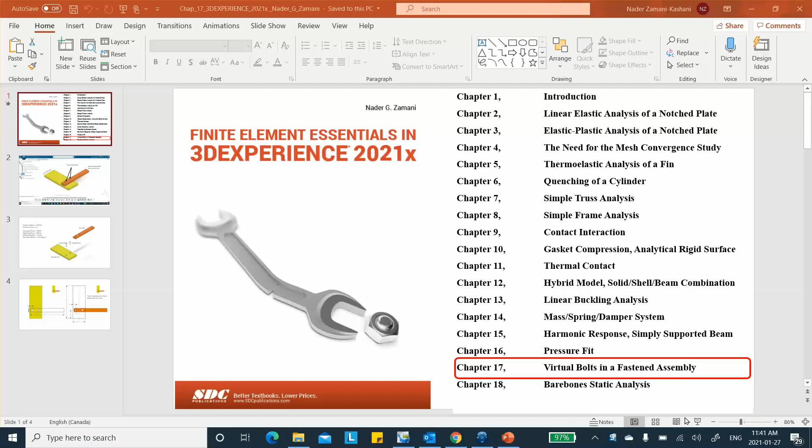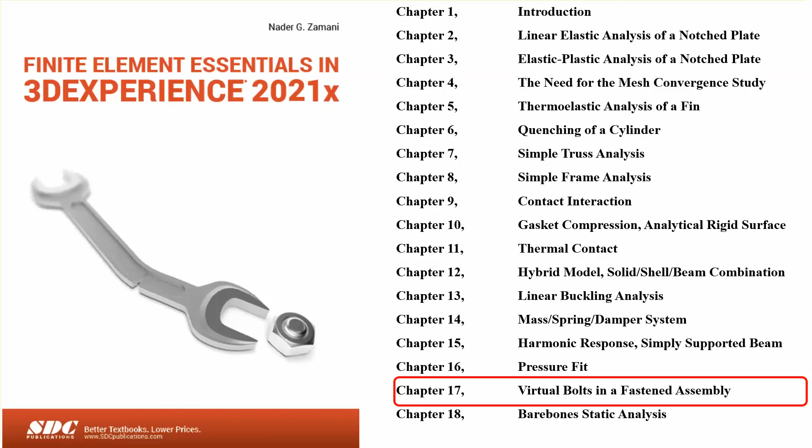All right, so there is chapter 17. In the older edition of the textbook, back in 2017 or 2018, this chapter was not there, and I've decided to put something about bolts in here, so that's what it is.

Here's the setup, and we have a yellow part, which I'll call the bottom part, and there is a top part, the orange one, and these are fastened together at those two bolt holes. The left end of this clamp plate, the yellow plate, is clamped, and the right end of this orange piece is subjected to downward force.

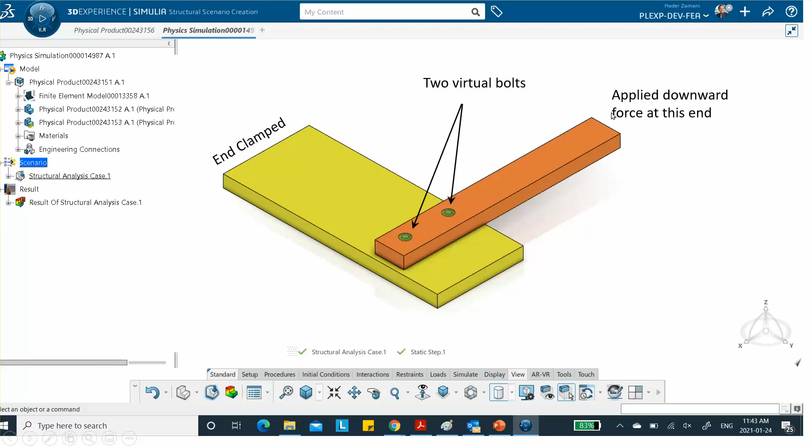So we're not going to be using a three-dimensional bolt model. We're going to be using a virtual bolt model, and the material is assumed to be elastic. This is the actual force applied to the orange part, 1,000 Newton, and the bolt force, or tightening force, or preload force, in each bolt is 1,000 Newton.

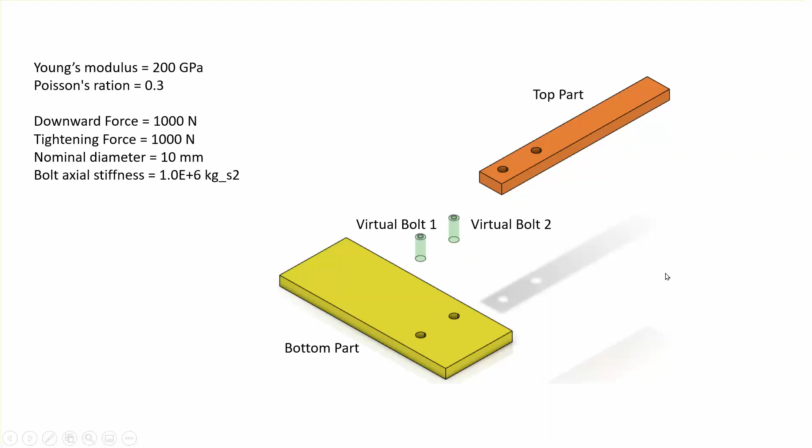Now, since I'm going to be assuming that the bolts deform, I will use a deformable version of the virtual bolt. I need to specify the stiffness for it, and the unit of stiffness in 3D Experience is kind of odd. Usually it's Newton per meter, and this has the same type of units, except that you're gonna have to multiply it by G, or divide by G, to convert from one to the other.

The dimensions are given here. These are very simple parts, so I'm not going to be spending time on modeling them. These parts were already created, so I'm going to bring them into assembly and put it together, and then we're going to run the problem.

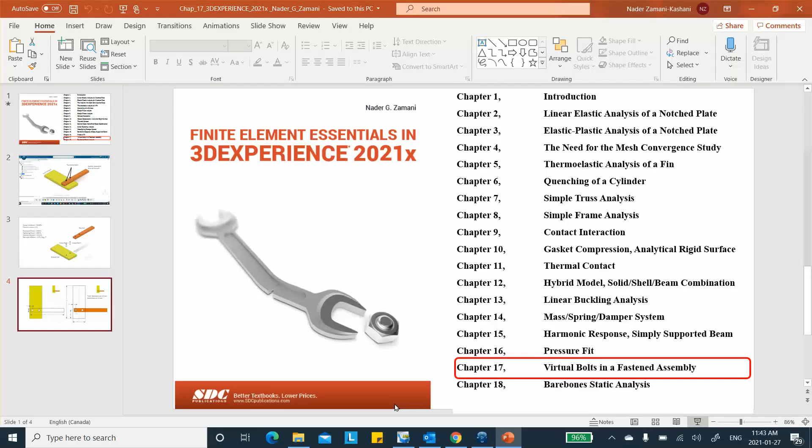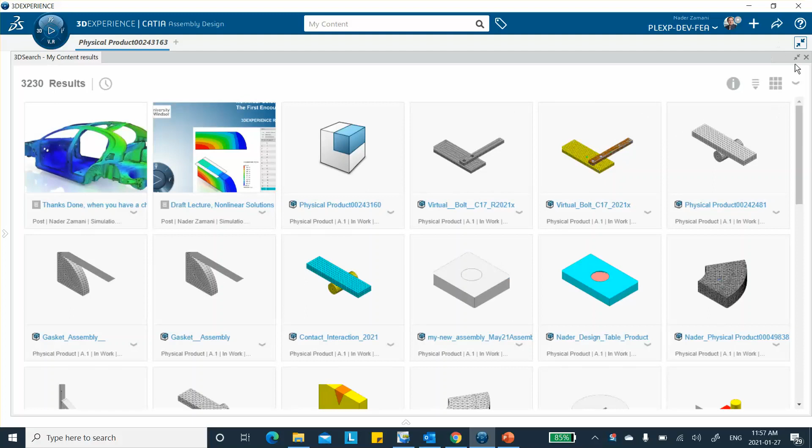All right, so let's see, are we there? Yes, I already made the part, so let me go ahead and search under my contents. First of all, I created an assembly here. These parts I created a few days ago, so I'll put it together. Let me sort this out by date. The two parts that I want are this one, the bottom and the top part.

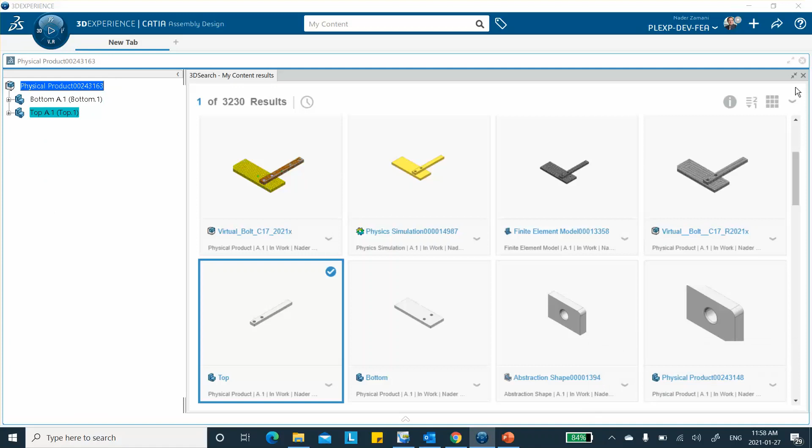Let me see what's the best way of doing this. Okay, where did it go? Right there, this is the bottom one. I'm going to take it and put it in there. And there's the top piece, put it in there too. Top and the bottom. I'm going to close this, save it right away.

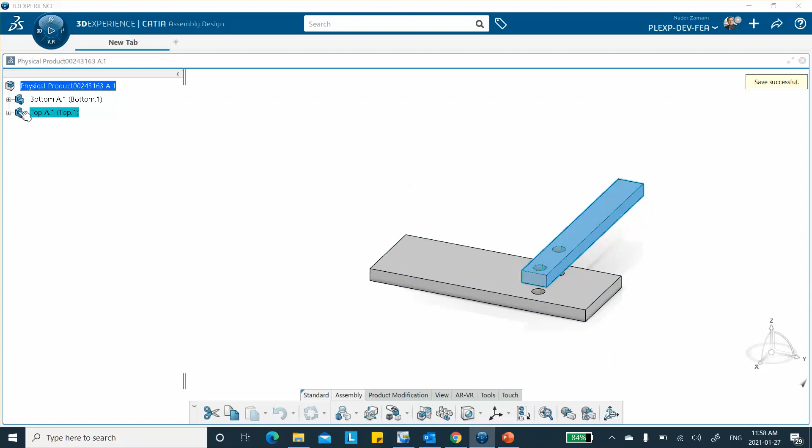Notice that I have to properly impose these two pieces together as an assembly with assembly constraints. Now, in the book, I didn't talk about it, I assumed that they were already in position. This is why I didn't bother putting constraints here, and because of that, these holes may not have been exactly lined up. That's why I got a warning message. But I'm not going to make that mistake here, so we'll fix it.

Right click, first of all, let's change the color of these things. I changed this thing to yellow, this is the bottom piece, and this one to orange.

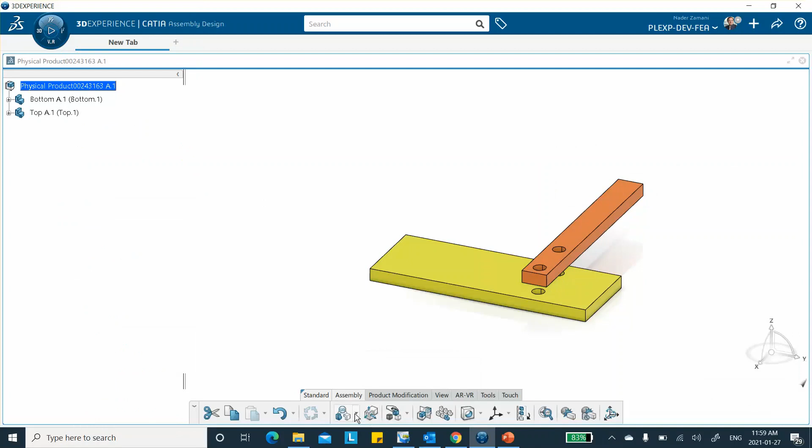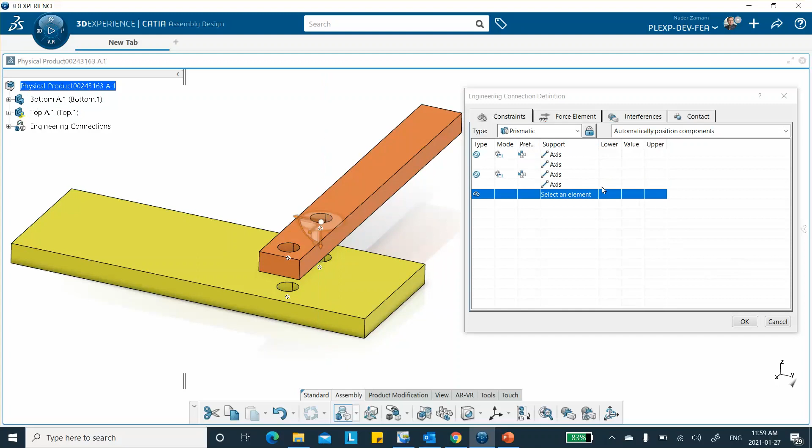Now we're going to go and create assembly constraints to bring these and put it together. So let me click on that. The hole up there and the hole down here, see, slightly moved it. These other two must be lined up, but just in case, I'll do this and that. Finally, contact, bring these two together, so I select this bottom surface and the top surface and say OK.

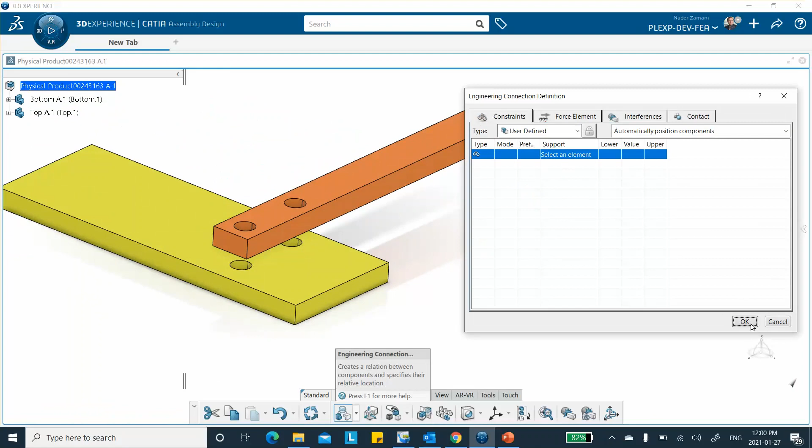Whoops, I don't think I did this last one properly, let's check it out. I'm not even sure if I actually... oh yeah, I probably accidentally pressed cancel. Okay, let's try it one more time. This axis and that axis, okay, this axis and... let's try it.

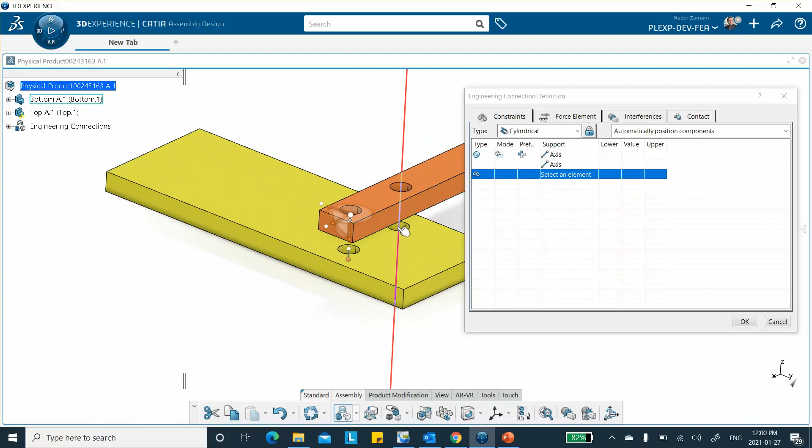This axis and this axis, this axis and that axis, and then this face and this face. Good. Okay. We're in business now.

So these things have material properties. I don't really need these constraints, I can delete them, it doesn't do anything, so I'm going to delete this. These parts were already assigned material properties, however there's a question mark here, so let me update.

We'll worry about it later on. Okay, so this is done. I'm going to save this.

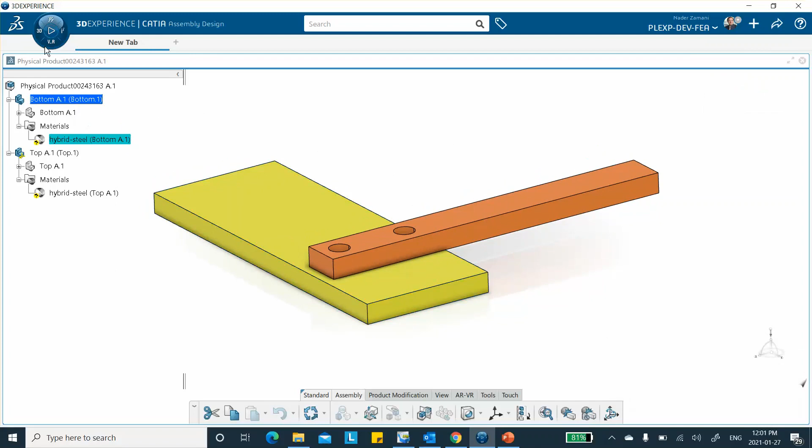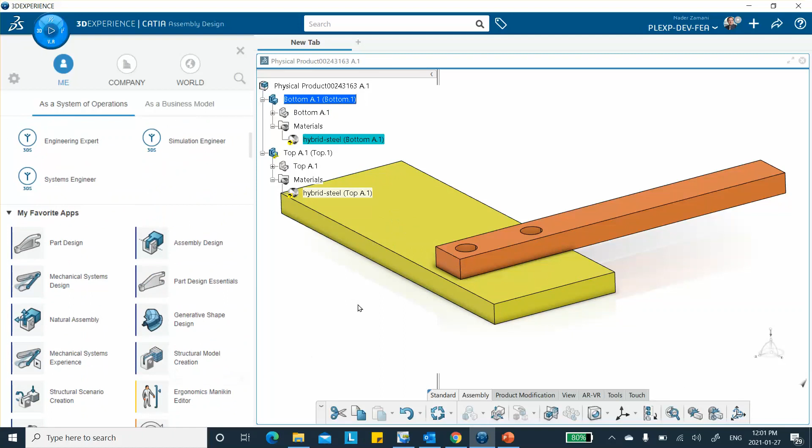Now we're going to go to structural scenario, structural model creation. But be careful, and I make a big fuss of this in the book. Right now I'm in one of the parts, and if you go to structural model creation, it will just mesh that part. So make sure before you go to structural model creation, you're at the assembly level. That means double click on the top line, make sure you're in the assembly design, and now go to structural model creation.

So what happens now is it's going to create meshes for these two simultaneously and put it at the top level right there. See, if I was in one of the parts, it would take this and put it in there, and then I'd have to do some more work to work it out.

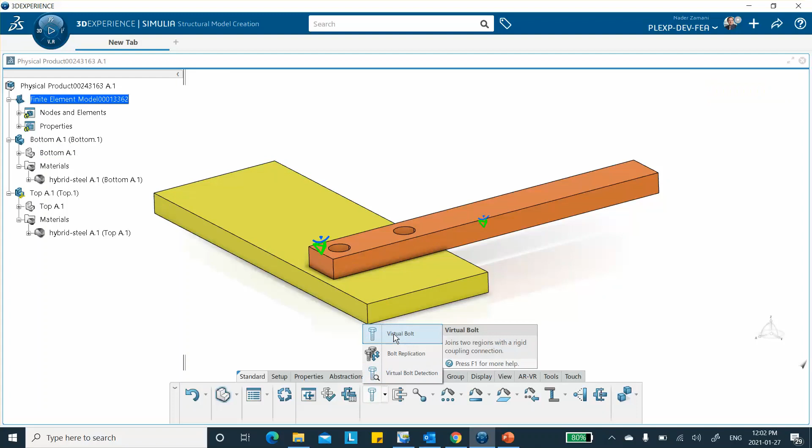Okay, this is fine. And now what we're going to do is create our virtual bolt model. We're going to use this one, okay? And it's asking for support one, so let's start with this one on the left, the bolt on the left.

So I select the top inside surface of that hole, and for the second one, let me cancel this and show you one more time. So we go virtual bolt. Notice that the top one says support one, and the second one is always ground unless you change it. So I want this surface, okay?

And when I did that, because these were already lined up, it automatically picked the surface below it. But when you follow the book, because these weren't lined up, I had to select the top, and then for support two, I had to select the bottom. So this is one step ahead, and I like it better here. In the book, for support one you take the top hole, and for support two you select the bottom hole, and it let me do that. But here, because I already put constraints on them and they're lined up, it automatically picked the other one.

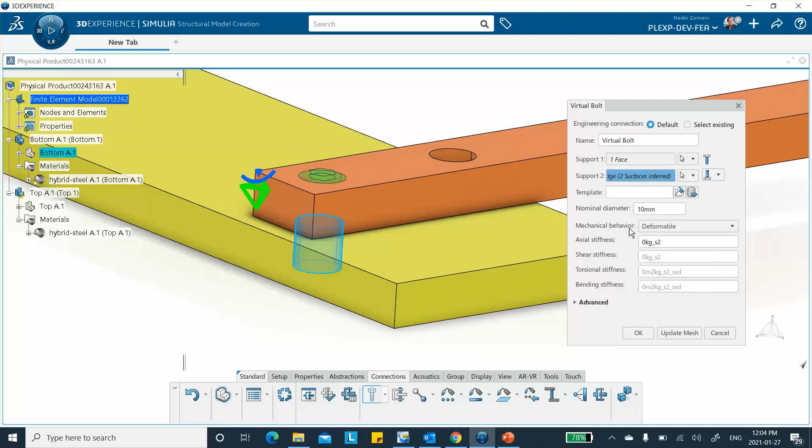As for the type, the inside nominal diameter is 10 millimeter, the diameter of that hole is 10. And for the stiffness, I'll put 1e to the 6, I believe. Okay, and just say mesh.

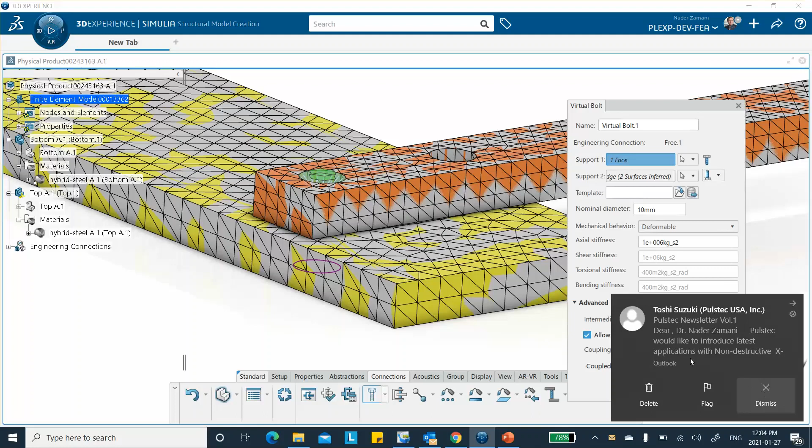Now I do exactly the same thing for the other bolt. So let me close this. Okay, so we can hide this mesh, it's easier without it. Right click, mesh visualization manager, mesh hide. Very good. Let me put this thing on the side here for you. Do another bolt.

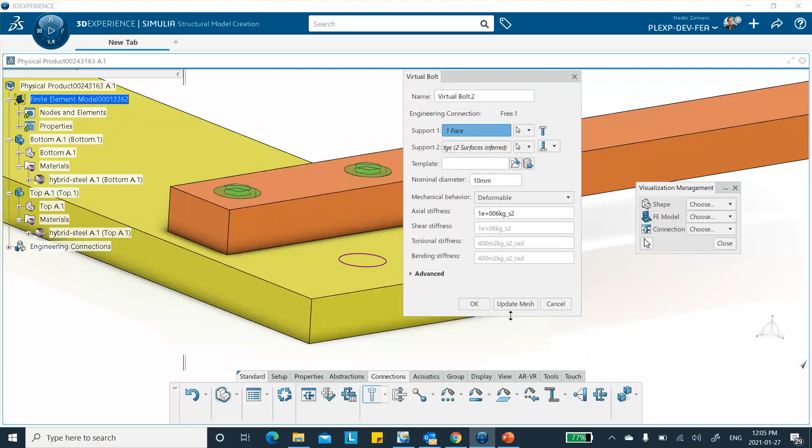See, it says ground here. When I select the top one, automatically it goes and selects the bottom one because they were already lined up. And I put the same stiffness, right? Same stiffness - they don't have to be the same, it could be different bolts, different type of bolts, but that's not what we're doing. Update mesh, okay, and say okay. Good. Save it.

All right. Notice that when you look at nodes and elements, you have the standard tetrahedral mesh for the yellow piece and the orange piece. You can go change the type, you can go change the size, and there are also two virtual bolts that are created here. Okay, so we are done there.

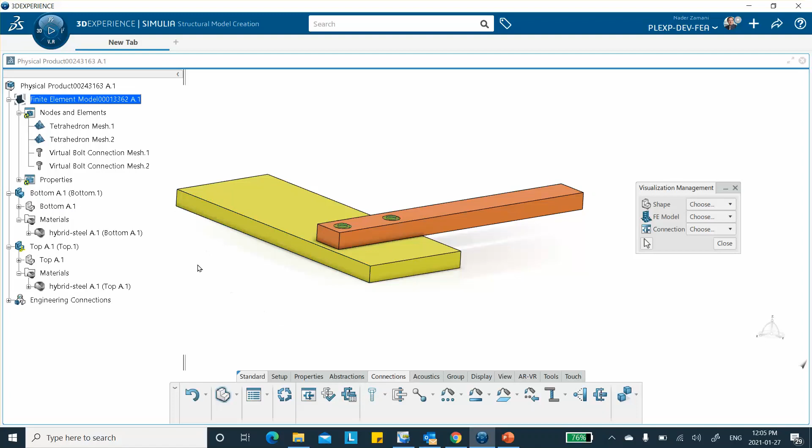And we're going to go to scenario, creating scenario, structural scenario creation. It's a structural problem.

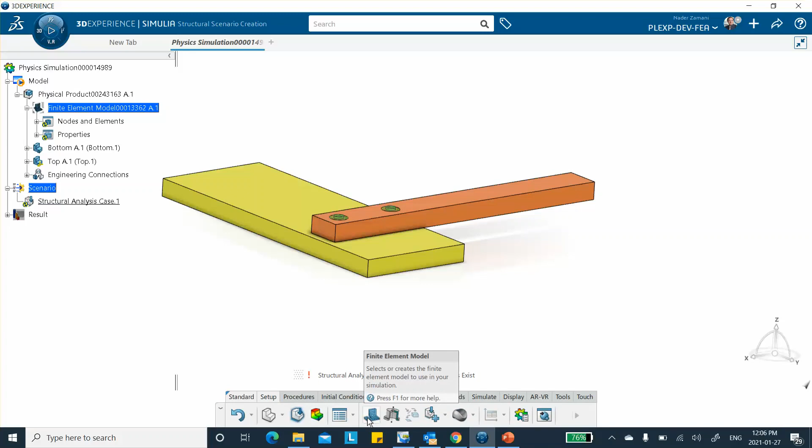Notice the usual two exclamation marks. The first one is set up, and it says select your finite element model. I select this. Now in the book there's something different on top, probably created because these two holes aren't lined up. But this is fine, so I select this and say OK.

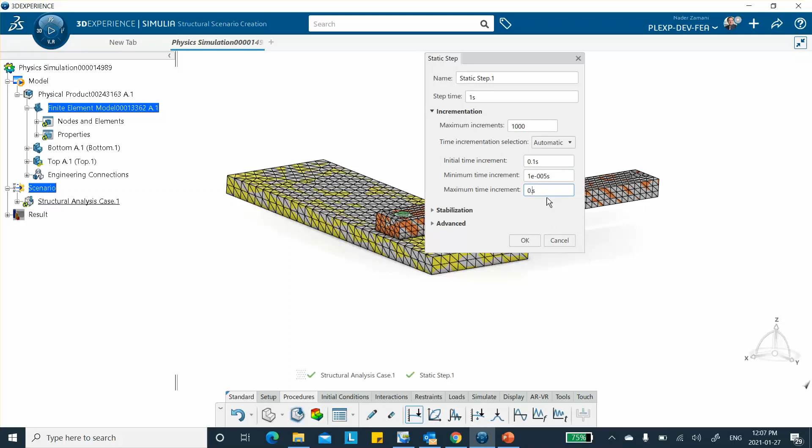Notice that this turns green. Now we're going to do the procedure. It's a static problem, so as soon as I do this, it's going to light up and turn green. I'm going to make the initial time smaller because I don't want this to be only 2 steps. I want it to go a few steps so I can see the development of the deflection. I'll make this one 0.5, not too big, though it will work with the defaults too. Say OK, and if you want to include nonlinear geometry and large deformation, check this. Otherwise leave it out. We will include it.

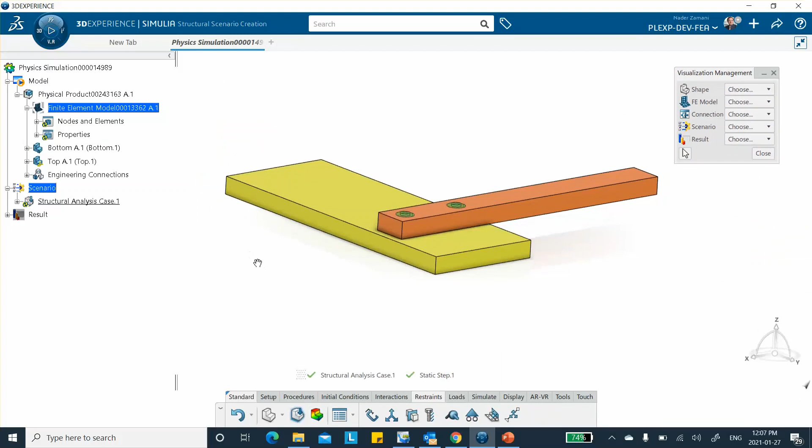Now we're going to apply our restraints. Let me hide this mesh - right click, visualization management, hide the mesh. Put this on the side here. We're going to go to restraint. This end is clamped, this end is clamped. Clamp that end.

The end on the right side, I apply 1,000 pound on it, 1,000 Newton on it. So we go to loads, force on that face, minus 1,000. And you can see that's down here.

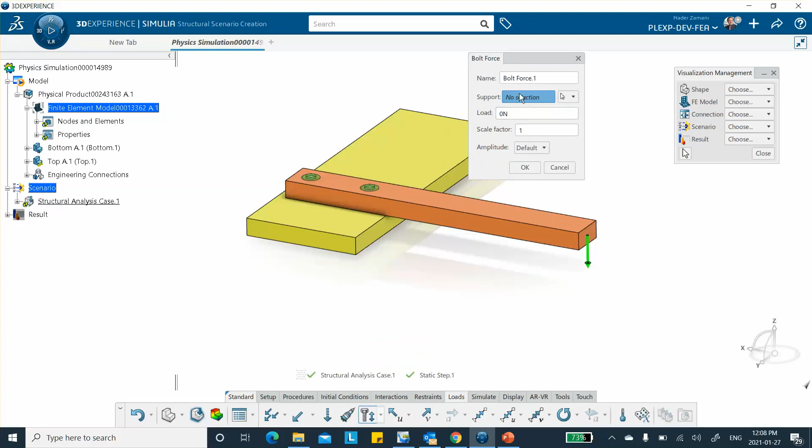Now I have to do the bolt forces, the preload or tightening force. If you look here, there is a bolt force, and that's the one I want - not the torque bolt force, and support is bolt 1. I can do that from the tree or from the screen. I select it from the screen - this is bolt 1, and I put 1,000 Newton in it. Remember, that does not have a direction. This is just the tightening force, which makes the bolt stretch and clamps the two pieces together.

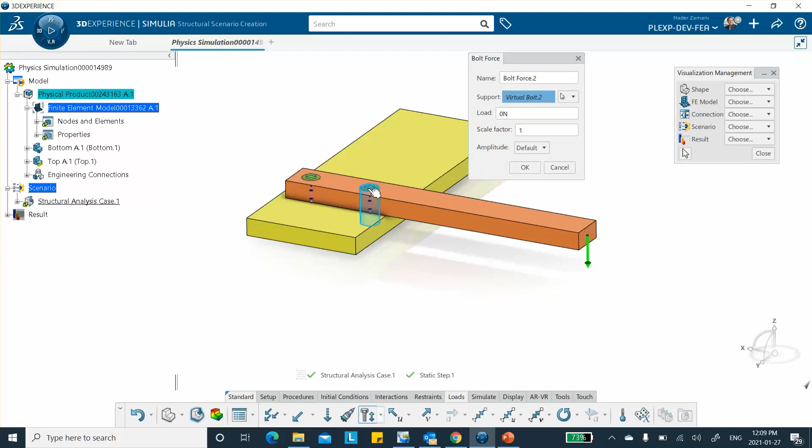Then apply or OK, and do another one for the other fellow right there. 1,000 - what is it, 1,000. Say OK. All right, and if I run this thing now, it'll bomb out because these two pieces don't see each other.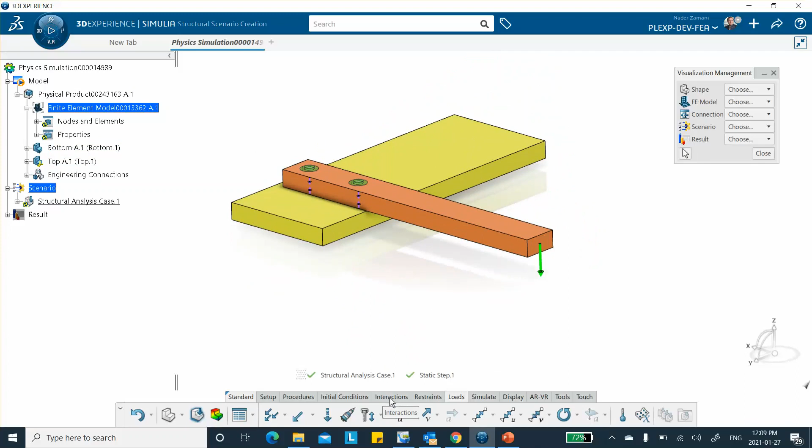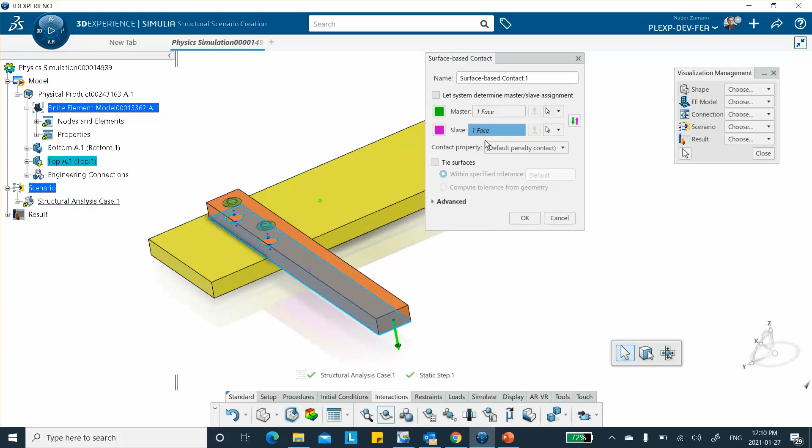So I have to create a connection, a contact constraint between these. We're not done yet - we have to create an interaction, surface to surface, surface-based contact. For the master, I'm not sure exactly what I did in the book, whether I selected this or the other one. There are some guidelines, but it doesn't matter that much in this problem - they're simple enough. I'm pretty sure I selected that surface for the master, and this bottom surface for slave. There are guidelines for selecting these, and if it doesn't work you can come and flip them, but this will work. Say OK.

And that's it - these two are not going to penetrate each other when we save everything. So we're going to go to simulate, we check it, and do a simulation check. Any error messages or warning messages will pop up at this point instead of running it and realizing there's a problem.

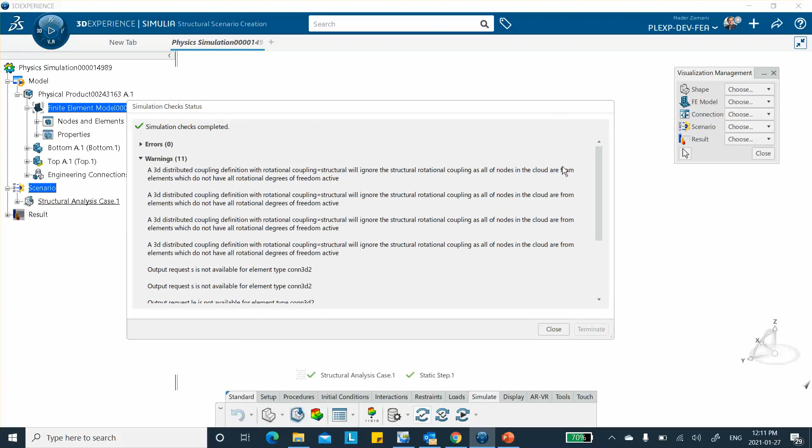In the book I got a variety of warning messages because of that constraint I showed you earlier. Here, we'll see how it goes - let's check what kind of message it is. Yeah, that's fine. The kind of messages I got without aligning those two is different. Okay, no messages, no errors. And now we're going to run it.

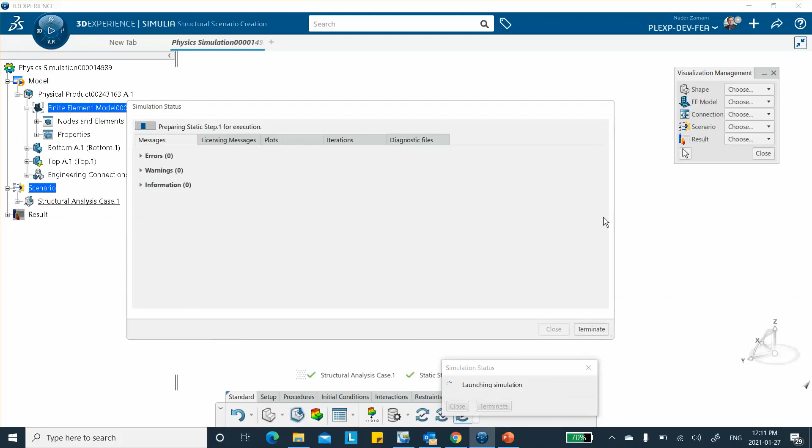While this is running, I want to remind you that the only difference between what you see here and what's in the book is that in the book, I did not apply those axis-to-axis restraints, constraints for the assembly. This is why I got some messages saying these holes are not lined up. But it did run.

Remember, these tabs tell you at what stage of the iterations you are with respect to a plot, giving a plot and an iteration number, etc.

So far, no error. These warnings are the same thing that appeared in the previous window. So, solving simulation.

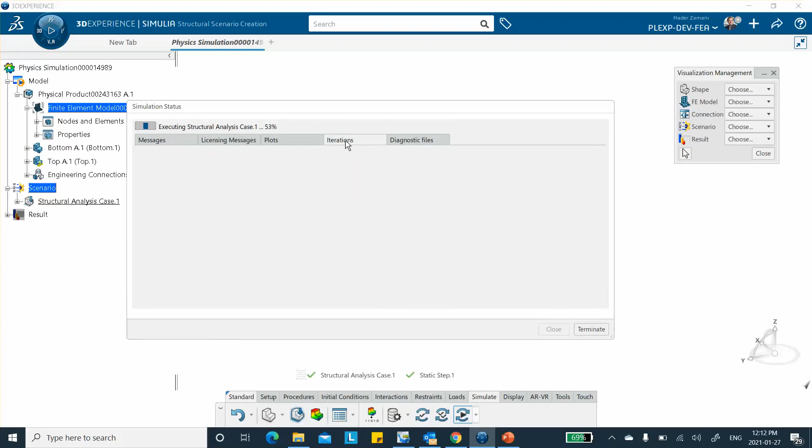Iteration count is right here. When it reaches 1, it means done. The full load was applied, and it did reach 1 right here.

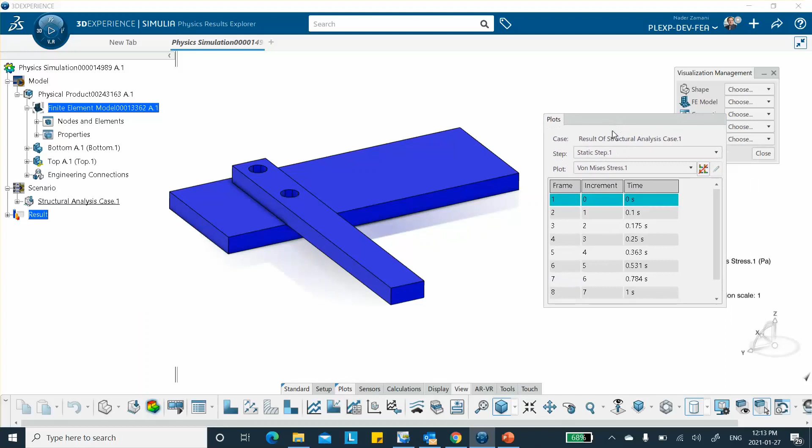Close this. So this is at the initial frame, which means no load applied. If you go to the next one, you see that this thing begins to bend, and of course it's like a cantilever beam. Biggest stress is going to be there. Then you go to the next one, etc.

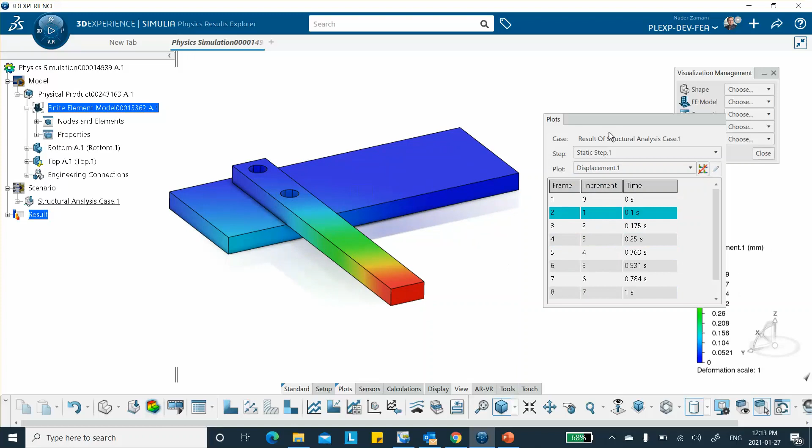And the last stage is this. You look at the deformation, displacement. Okay, first step is right here. These values, of course, mean something. So the last stage is here, 12 millimeters. This tip is deflecting 12 millimeters.

But if you look at the side, you see that there's a lift off here. What that means is that the force of this bolt was not sufficient. So what I'm going to do is double this force. Remember it was 1,000 Newton. I'm going to double it up.

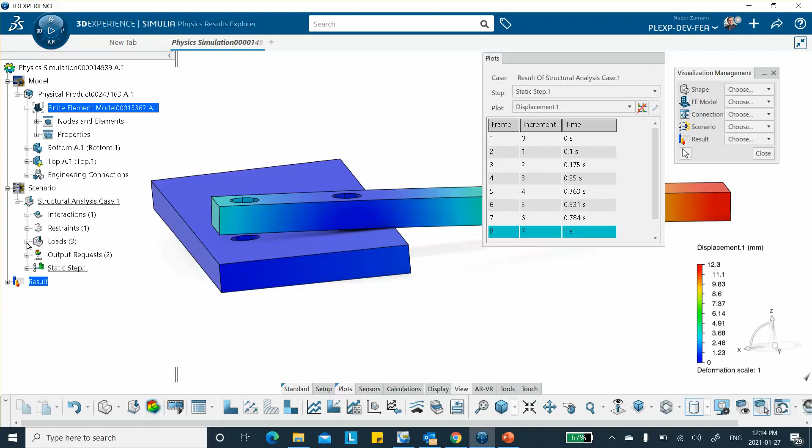So let's go back to the scenario here, and under loads and under the bolt force 1, I'm going to double click on it, and change this thing to 2,000, and say okay. Since I know that this, in all likelihood, will not have a problem running, I'm going to say simulate.

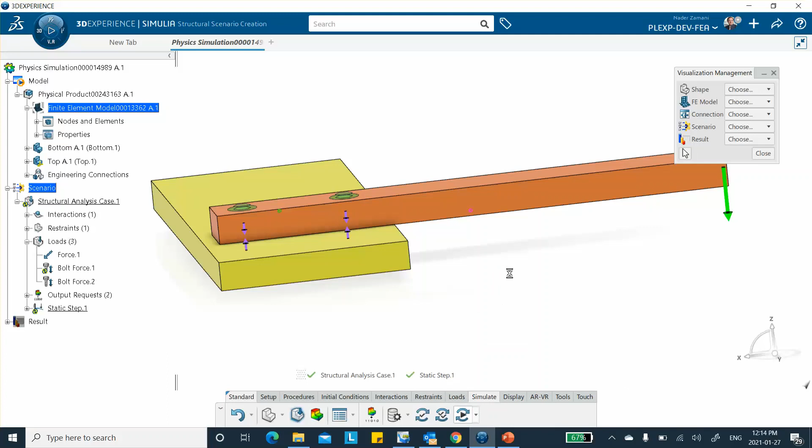Okay, it's coming along. It's almost done, so this should go 100%. And yeah, extracting results. So the solution is done now. It's getting results for post-processing.

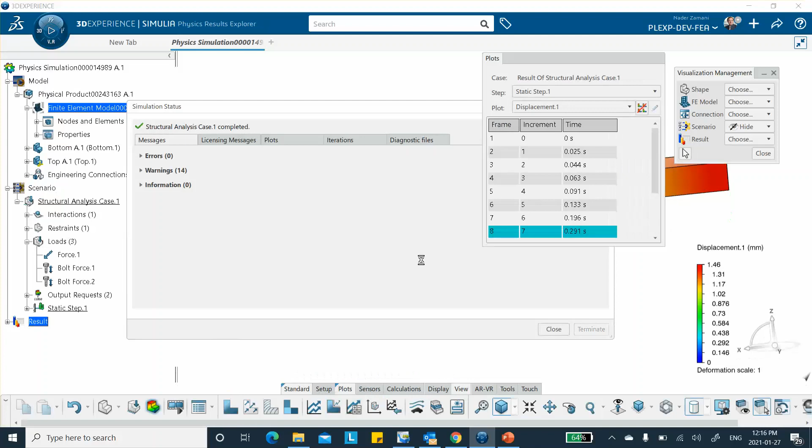Okay, good, so close this. Notice that this deflection was 12 millimeters before; now it's down to 1.46 millimeters, and these two maintain contact.

Now, there's something else I want to show you. What if I remove the concentrated load here? Well, there's still the preload in the bolts, and there must be some stresses. So I'm going to delete this, and I'm going to run it again.

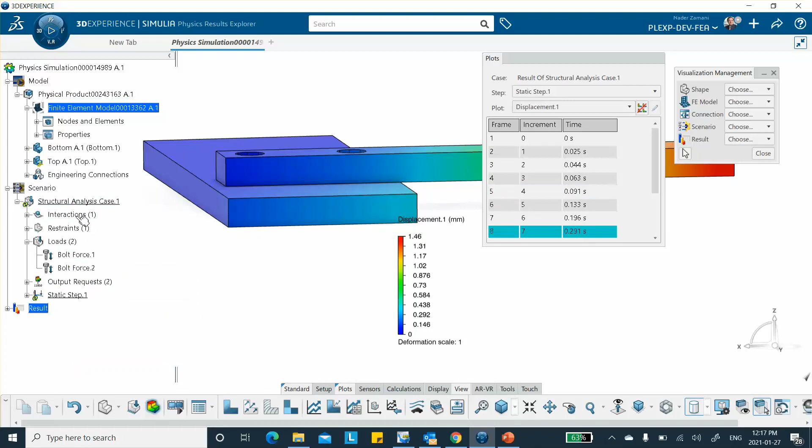Where are we in this scenario? Let's go back to scenario. The concentrated force has been deleted, so we're going to run it again, and we're going to see that there are some stresses, and that's due to the clamping force or the preload in the bolt. There's no external force on this structure, but there is the preload. Just give it a couple minutes, and you'll see it.

Now, the reason I added this chapter was one of my colleagues at Wichita State is using the software and the textbook for his machine design course, and they felt it would be helpful if they had a simple problem which involved bolt design, and this is the simplest one that I could think of.

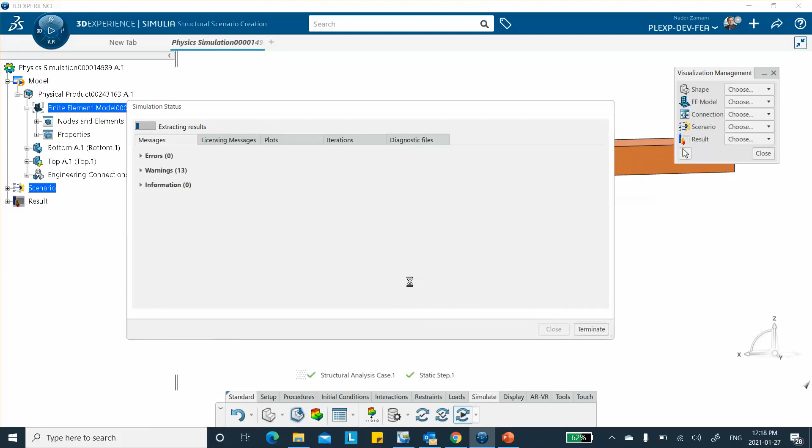Extracting results, doing finite elements, doing it for post-processing purposes. So give it time. There we are. Close it.

If you look at the von Mises stress, you see there's no load on the structure, but the fact that the bolt is tightened causes a stress in this bar and a stress in that bar. The tightening load here was 2,000, double of that. This is why there's more greenish color here.